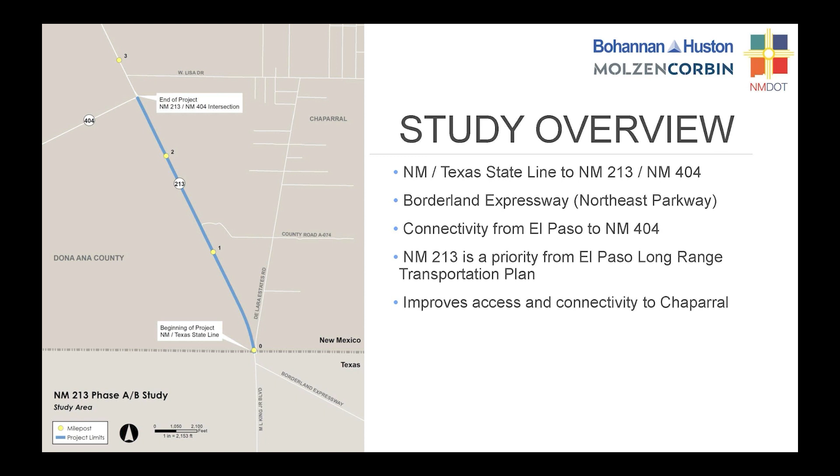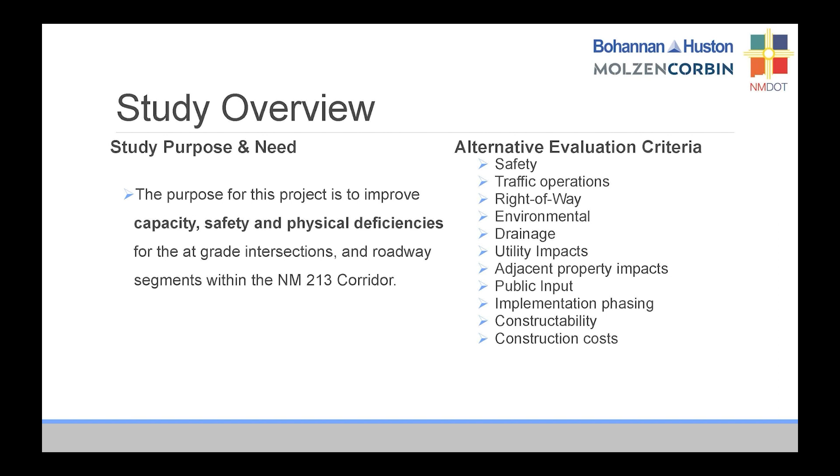The alternatives evaluation criteria included the following: safety, traffic operations, right-of-way, environmental, drainage, utility impacts, adjacent property impacts, public input, implementation and phasing, constructability, and also construction costs. The second thing that we'll be going through was the alternatives analysis that was completed for the Phase A-B study.

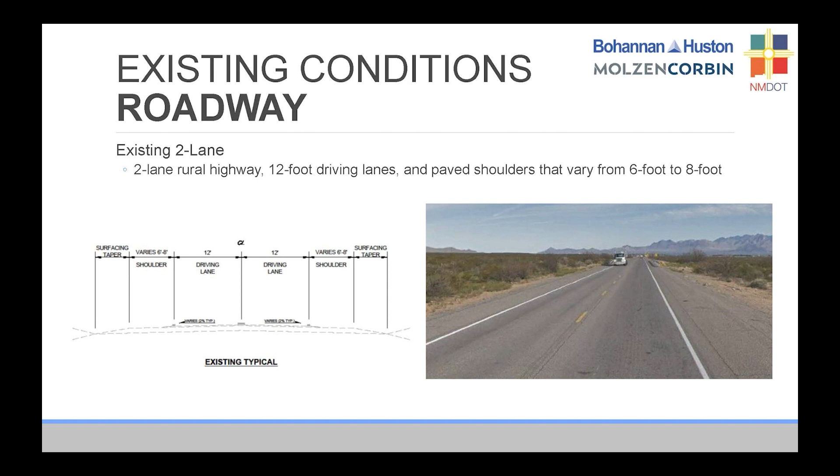The existing conditions of the project consist of a 2-lane rural highway, 12-foot driving lanes, and paved shoulders that vary from 6 foot to 8 foot. The existing roadway is classified as a rural primary arterial. For a roadway of this classification, the State Access Management Manual recommends the minimum spacing between turnouts should be a minimum of half a mile.

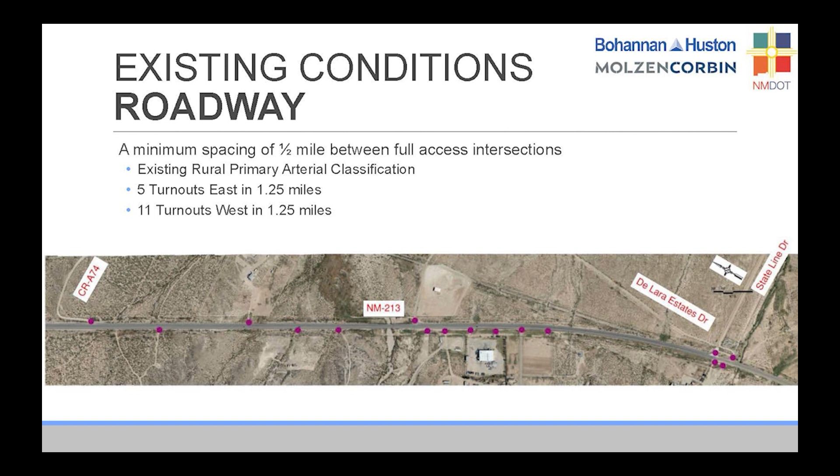However, as you can see in the exhibit, where each purple dot represents a driveway turnout, we have 5 turnouts to the east and 11 turnouts to the west in a 1.25 mile section between State Line Drive and County Road A74. Through the study process, crash history was analyzed, showing an improvement in safety since the roundabout was installed. However, the data confirmed a higher than normal rate of crashes through the corridor.

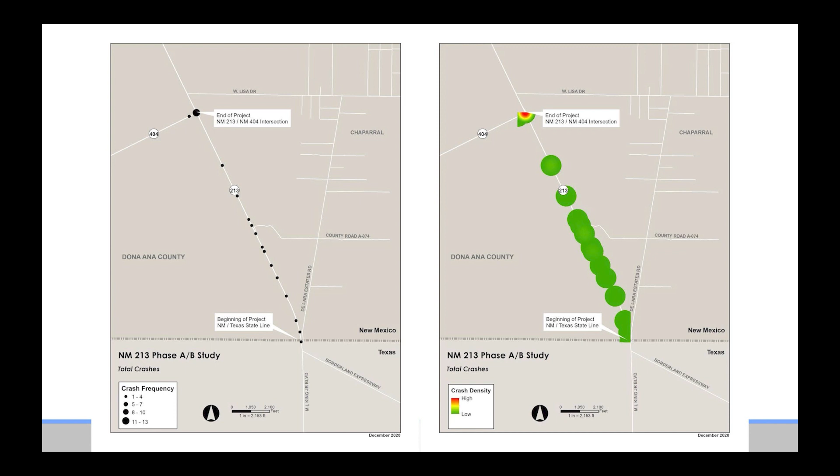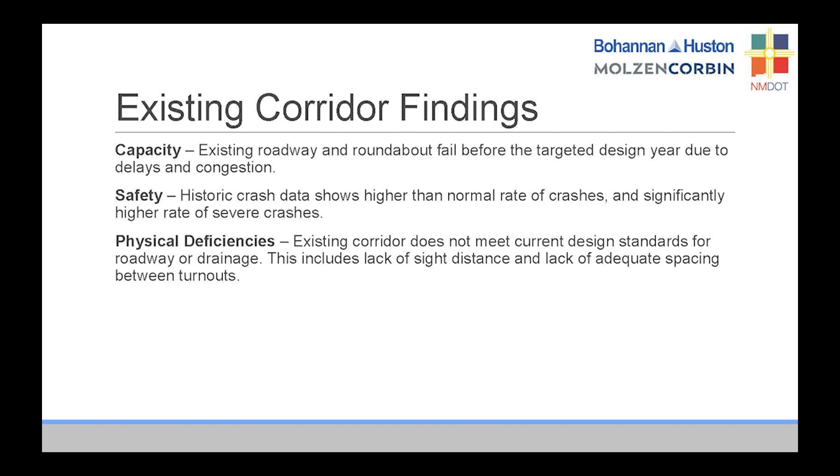Findings of the existing corridor consisted of capacity and physical deficiencies. For capacity, the existing roadway and roundabout fail before the targeted design year due to delays and congestion. For safety, historic crash data shows higher than normal rates of crashes and significantly higher rates of severe crashes. The physical deficiencies consist of: the existing corridor does not meet current design standards for roadway or drainage. This includes lack of sight distance and lack of adequate spacing between driveway turnouts.

Through the study process, 6 alternatives were prepared, including the no-build alternative. Corridor alternative number 1 was a 4-lane divided. Corridor alternative number 2 is a 4-lane divided with frontage roads. Corridor alternative number 3 is a 4-lane divided with concrete wall barrier. Corridor alternative number 4 is a 4-lane concrete wall barrier divided highway with frontage roads. Corridor alternative number 5 is a 4-lane with 2-way left turn lane.

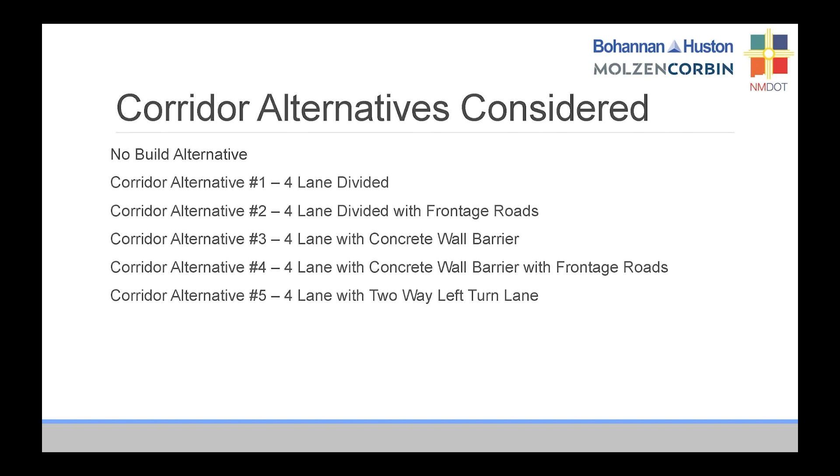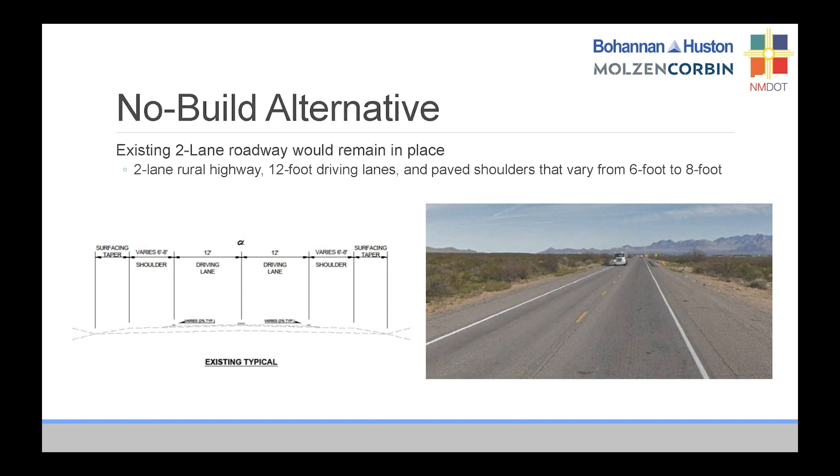Every study has a no-build alternative. The existing 2-lane roadway would remain in place under the no-build alternative: the existing 2-lane rural highway, which consists of two 12-foot driving lanes and paved shoulders that vary from 6 foot to 8 foot. Corridor alternative number 1 would consist of a 4-lane divided highway. All 4 driving lanes would be 12 feet in width, and the inside shoulders would be 6 foot wide, and outside shoulders would be 10 foot wide.

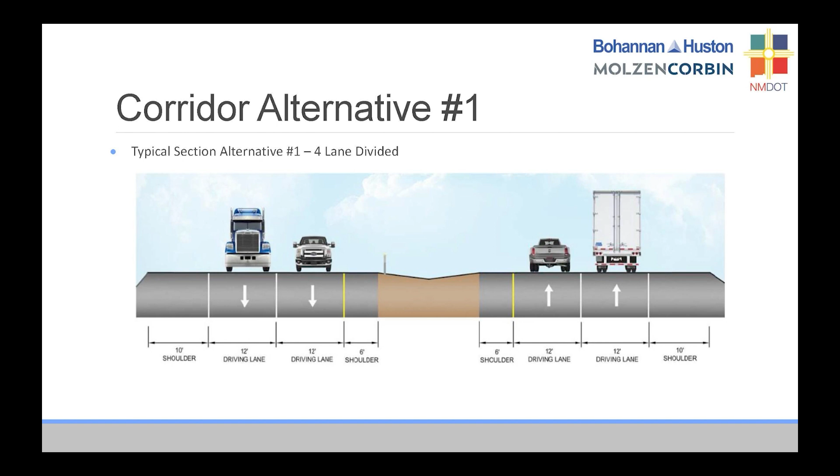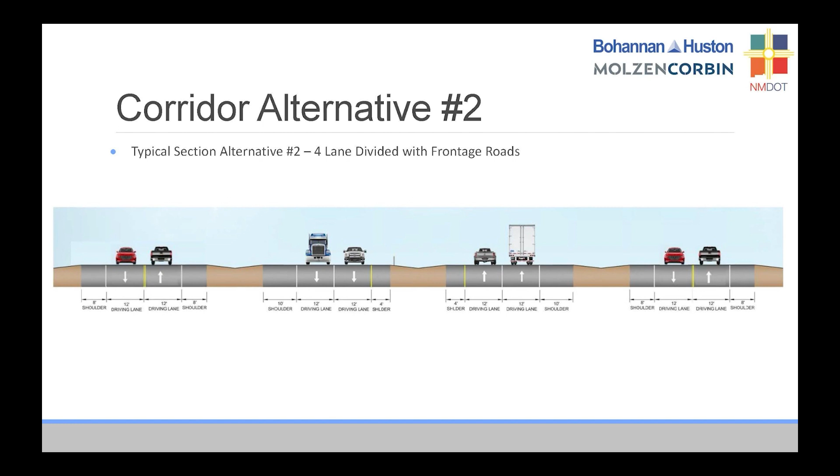Corridor alternative number 2 would consist of a 4-lane divided highway with a bidirectional frontage road on the west and east side of New Mexico 213. All driving lanes would be 12 foot wide. Medians would provide the division between frontage road traffic and New Mexico 213 north and south.

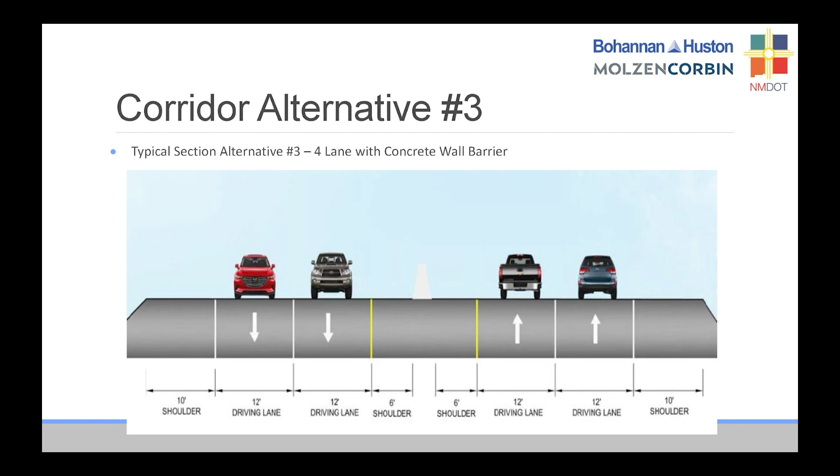Corridor alternative number 3 would be 4-lane divided highway, but the division would be accomplished via concrete wall barrier. Each driving lane would be 12 foot wide. Inside shoulders near the barrier wall would be 6 foot wide, and outside shoulders would be 10 foot wide.

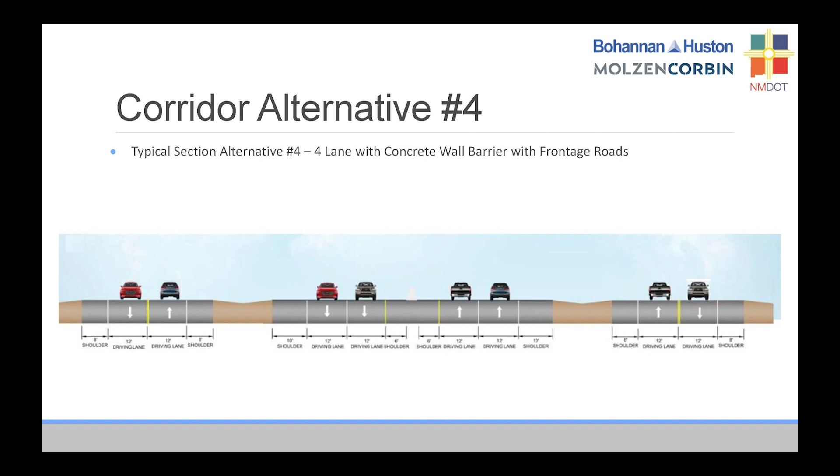Corridor alternative number 4 consists of a 4-lane section divided by concrete wall barrier with frontage roads on both the east and west side of New Mexico 213. The frontage roads would be bidirectional.

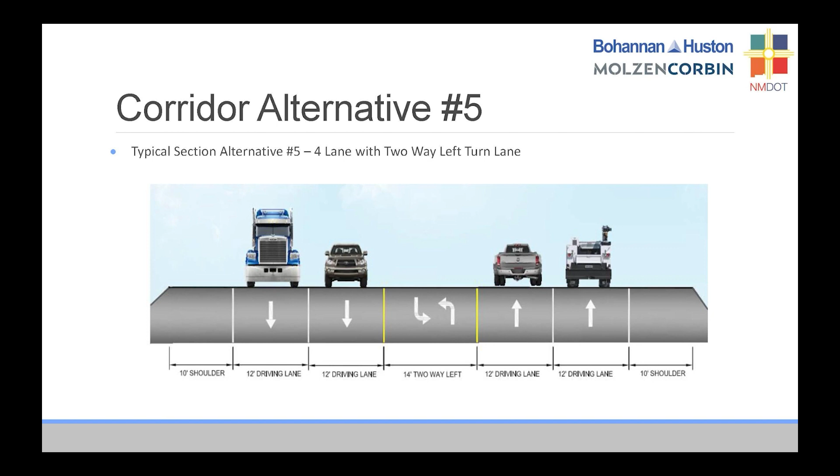Corridor alternative number 5 consists of a 4-lane section divided by a 14-foot wide 2-way left turn lane. All other driving lanes would be 12 foot wide with 10 foot wide outside shoulders.

Interchange alternatives considered included interchange alternative number 5, which was the braid, interchange alternative number 7, which was the grade separated split braid, and then interchange alternatives number 1 through 4 and 6 were eliminated through the Phase A initial evaluation of alternatives. Alternatives considered but not selected can be viewed on the project website.

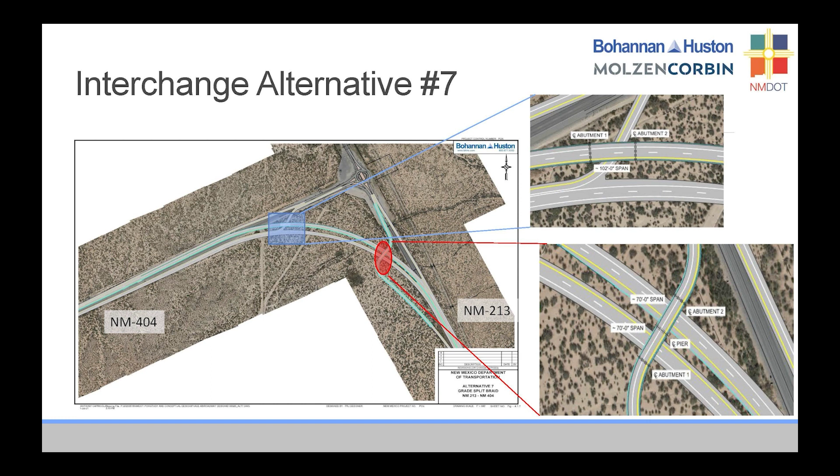Interchange alternative number 7 is similar to interchange alternative number 5. The connection between New Mexico 404 and New Mexico 213 would still be accomplished via divided 4-lane, and local traffic and traffic that desired to go north on New Mexico 213 would utilize the existing roundabout, which would remain in place.

However, instead of having both braided ramps going over, the eastbound and northbound ramp in the upper right-hand corner would go under the north to west connection. The southbound 213 traffic would still bridge over the 4-lane divided roadway section similar to the other alternative option, number 5.

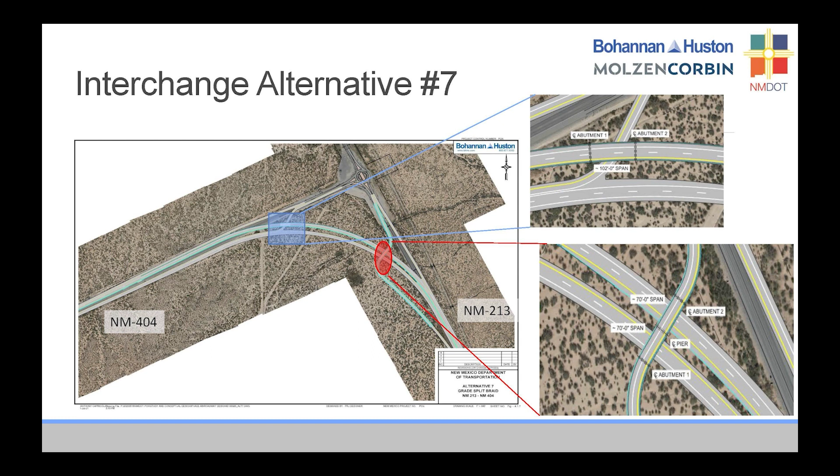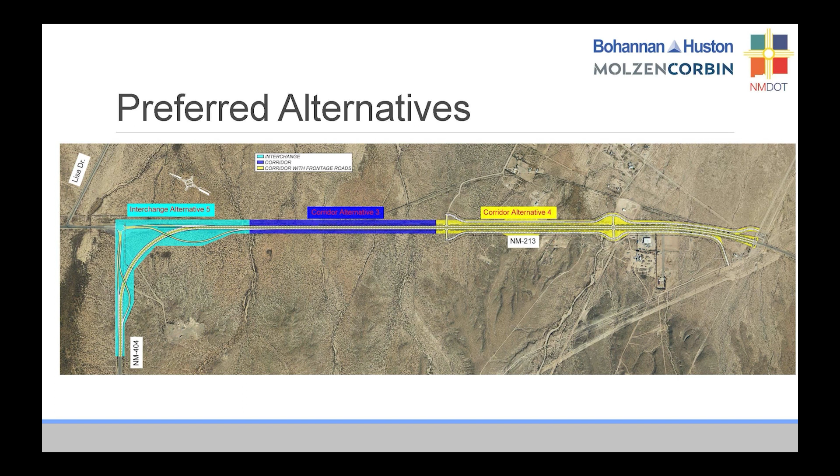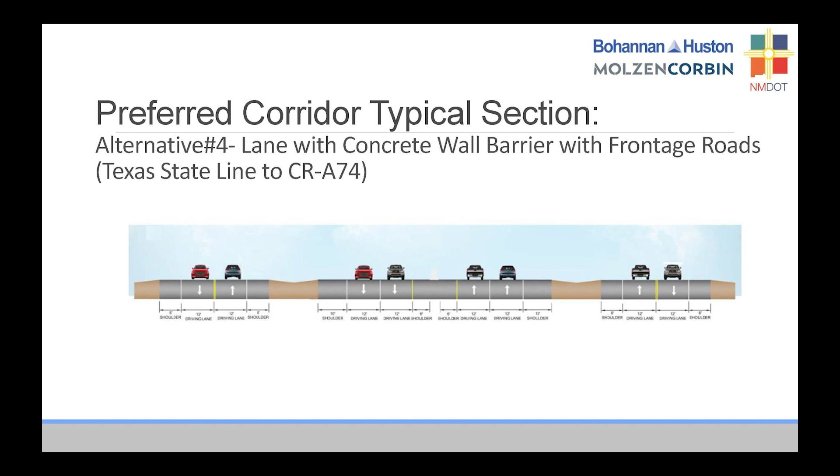And at the interchange of New Mexico 404 and New Mexico 213, interchange alternative number 5, the braided ramps, is the preferred alternative. Starting with the yellow section, from the state line to County Road A74, the preferred section is alternative number 4, which consists of a 4-lane concrete wall barrier divided roadway with bi-directional frontage roads on the east and west side of New Mexico 213.

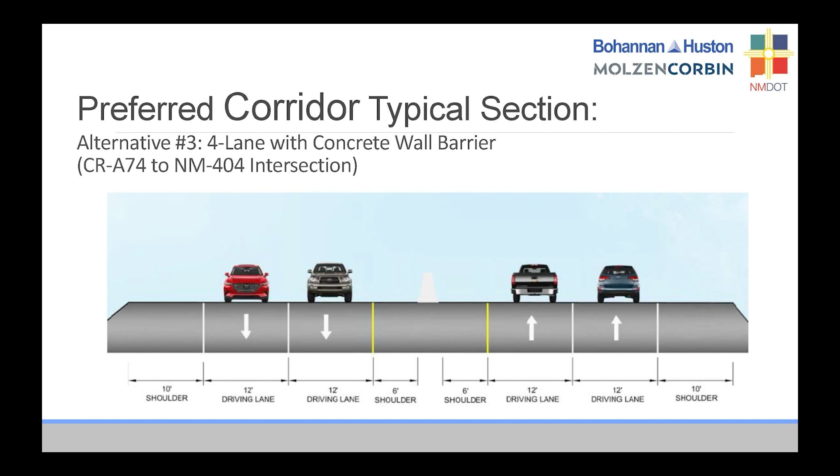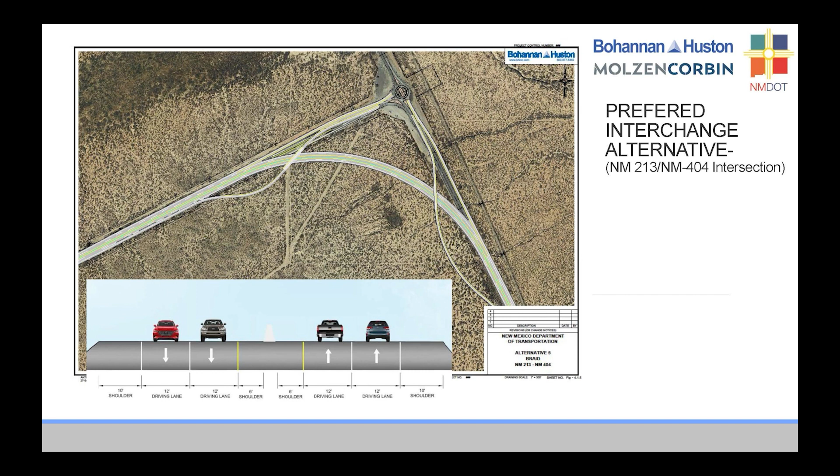From County Road A74 to the New Mexico 404 intersection, the preferred corridor typical section is alternative number 3, 4-lane with concrete wall barrier. Interchange alternative number 5 was the preferred interchange alternative for the New Mexico 213-404 intersection.

Next steps, NMDOT location study process. The study is being conducted in accordance with the NMDOT location study procedures, which were developed to comply with the National Environmental Policy Act. The study process includes an initial evaluation of alternatives, a detailed evaluation of alternatives, and an environmental investigation. As you can see from the figure, we are in the middle stages of this project. We have just finished the detailed evaluations and are presenting the findings of the study along with the recommendations for the interchange and corridor.

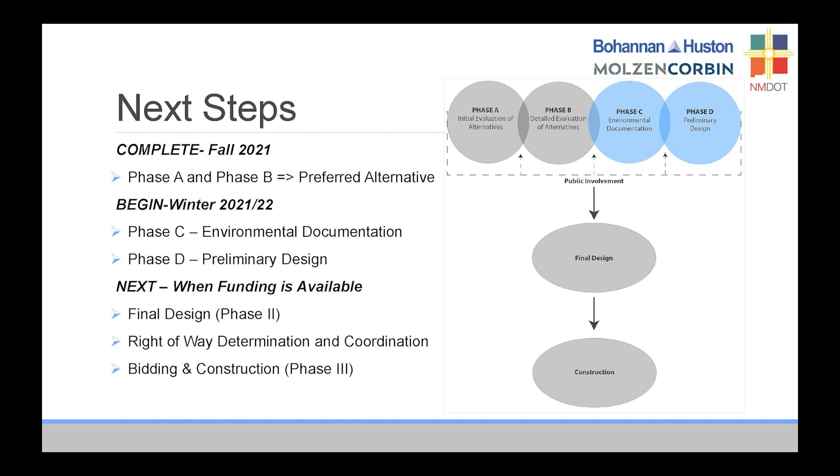The study process is only a portion of the overall development project. As you can see from the diagram on the right, once the evaluation of alternatives is complete, we still need to complete the environmental documentation, preliminary design, and final design before NMDOT can start any construction on this corridor. I will note that construction funding is yet to be identified for this project.

Public outreach. We want your input. You have an opportunity to provide feedback at tonight's public information meeting, and we will be meeting with agencies and project stakeholders to get their input as well. But it's important for you to provide this input because your input makes this corridor better.